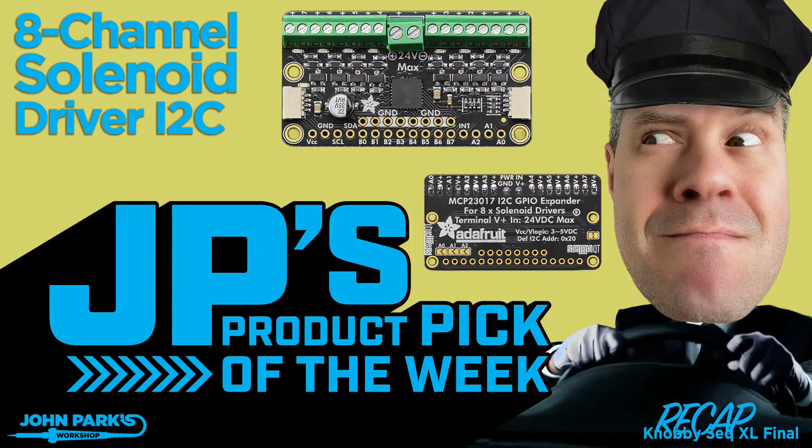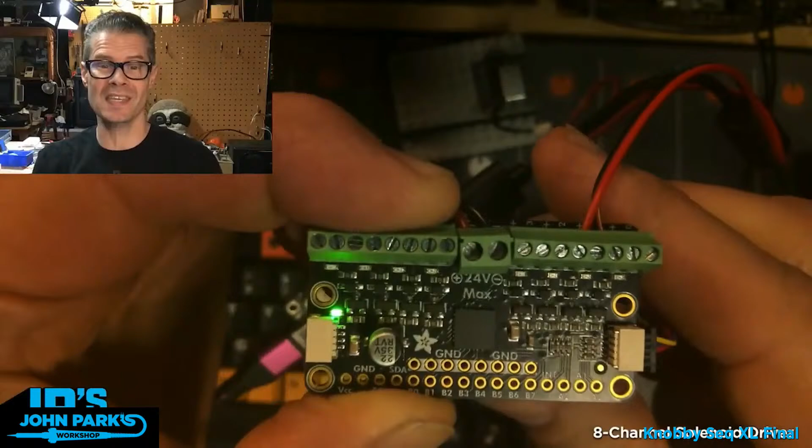Here's a 1-minute recap of this week's product pick: the I2C 8-channel solenoid driver. This can be used with Stemma QT for easy hookup, and it can be solderless since we can provide power to the middle screw terminals. All the solenoids you can drive have their own screw terminals, 4 here, and others scattered around a bit.

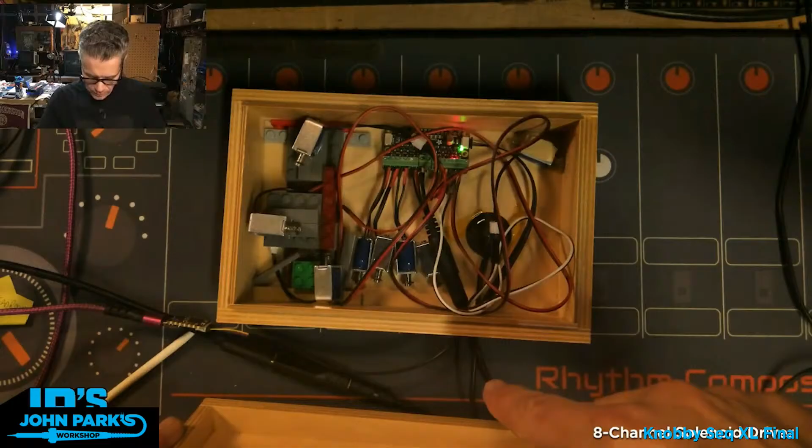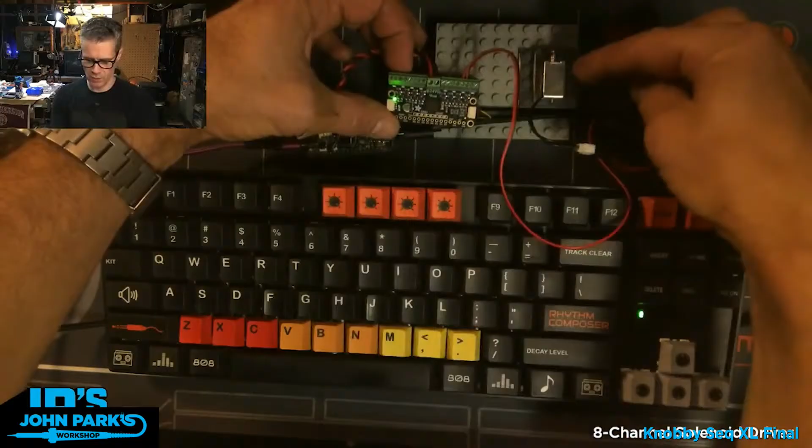Not a typewriter project, but I love this project. I made a little mini version I can demo: a USB cable runs to the computer, into the Feather with USB host RP2040, then my keyboard is plugged into that. Data and power go to the solenoid driver board, and I have this little baby solenoid here. With every stroke I type, we get the little solenoid driving. It's the I2C 8-channel solenoid driver board with Stemma QT.

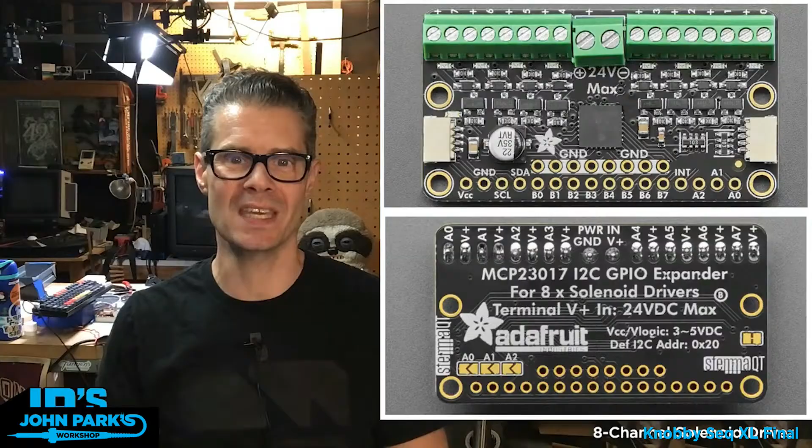Yep, that's what it is. I'm just plugging something in, so I was a little slow on the draw there. Let me plug in the Feather board I have sitting here for our next section. Whoa, hey, stop that - I'm gonna ruin all my camera work for the downshooter for this, but it's worth it, right? Here we go.

Let's get ready for this CircuitPython Parsec.

Oh, haha, I hadn't turned the mic back on from before. Thanks, Andy Calloway just said microphone. It's okay, I was just vamping as I plugged in something.

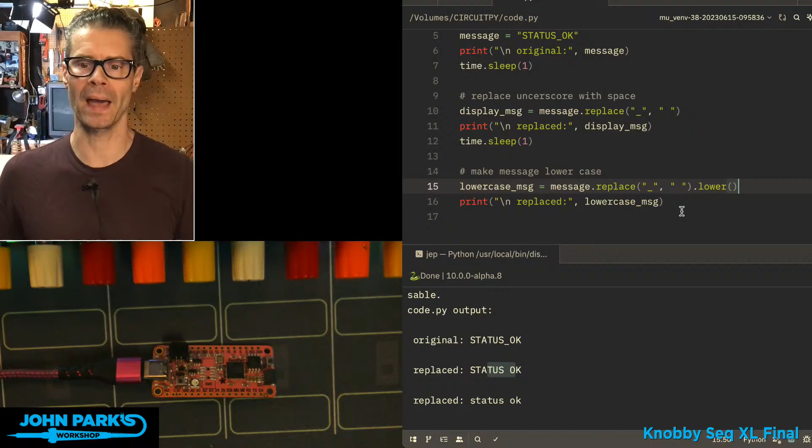Now we can make this a little friendlier by adding another command, dot lower, which does exactly like you think. It takes the original message, still does the replace, but now tacks on this additional dot lower. So you can stack up these string formatting things. I say print replaced with lowercase message, and that gives us this final one: replaced is status space OK, all lower case, much friendlier - the computer doesn't need to yell at us. That is how you can clean up your text using dot replace and dot lower on your string messages. And that is your CircuitPython Parsec.

All right, I got my microphone running this time. Thank you, sorry about that before.

All right, so now next up, let's dive into - let's jump into this gizmo right here that you can see. I'm going to raise that camera up a little bit, and I'll fix my... I really need a new camera arm, this one is screwy.

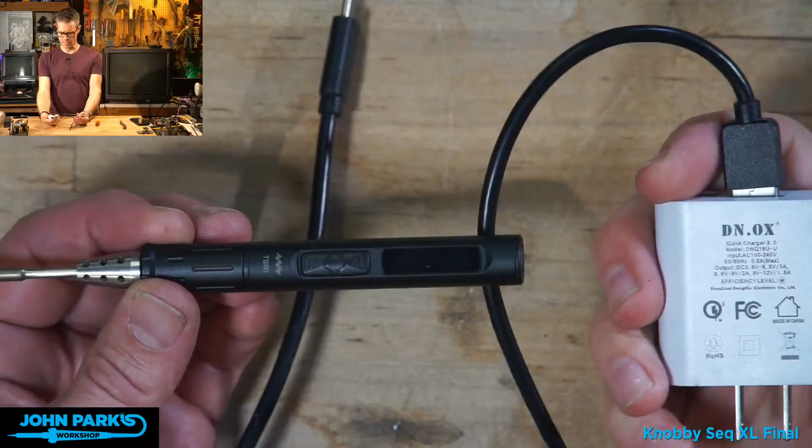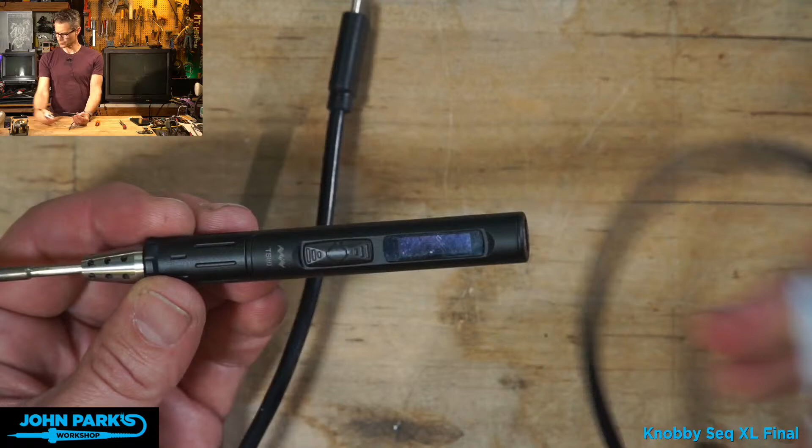And I was trying different USB cables because I was worried I was just underpowering the thing. It comes with and uses a power delivery supply - this is the one that came with it, and it can ask for 9 to 12 volts at 1.5 amps, and I think what it asks for is 9. I knew that supply was working, and this is a nice quality, thick USB-C cable, A to C cable. But it was throwing a sensor error, so I figured something was wrong with it. I went after the show and looked at some troubleshooting info on it, and one of the first things I saw was the main manual's very first page talked about assembly.

Oh, I forgot, I've never undone this. That's how it came in the package. It's meant to fold down real small so you can carry it with you.

I forgot it uses this little 3.5mm TRS jack, which is wild, as the connection for power and sensing. So for it to check the tip temperature, which is I think the sensor error we were getting, or maybe there's just a check for whether you have a tip plugged in at all.

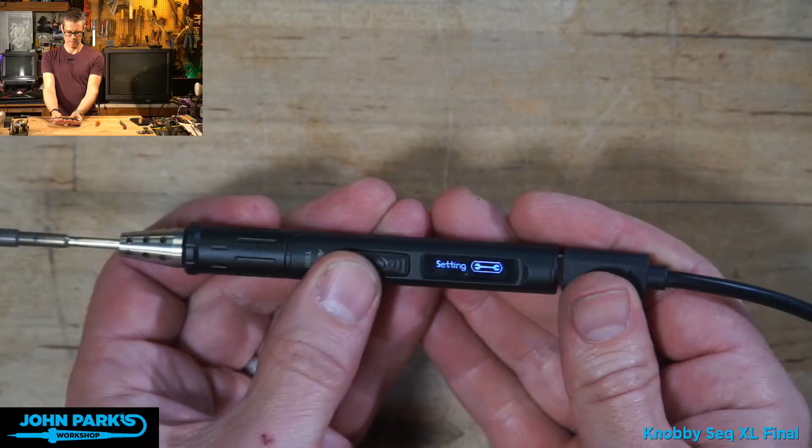This was pulled out a tiny bit and I didn't notice. So when I was trying to use it, I got... all right, looks good, great, heating. Oh, it's heating now. All right, let me pull it out a little more. Sensor error — so it was like there, enough to get me a sensor error. Plug it in the rest of the way. Let's restart it.

Good, if I press that first button, it'll start heating. It also has a little tilt sensor in it, an accelerometer of some kind, so I think it will cool itself when it's level, like if you set it down on a surface.

Some nice safety warning just showed, classic safety first: if it smells like chicken, you're holding it wrong.

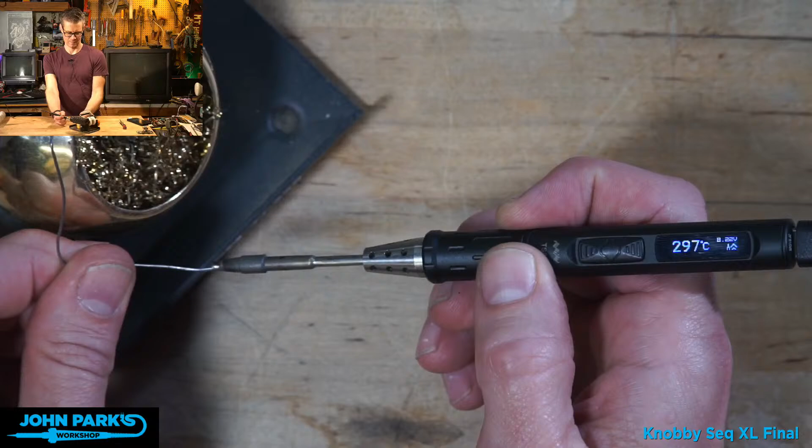So now we have... yay, we've got solder. I think this... oh, it just said low voltage. I think I'm wiggling this thing out too. Yeah, this is not the original cable it came with, and this one is wiggling a little bit, so that's not a good sign. But as far as the problem I was really having, I'll try some different cables.

Sensor error is gone. This reads 8.22 volts, I guess that's what it's using. Kind of curious if we throw a meter in the middle — so yeah, it's about 8.3 volts at 2 amps.

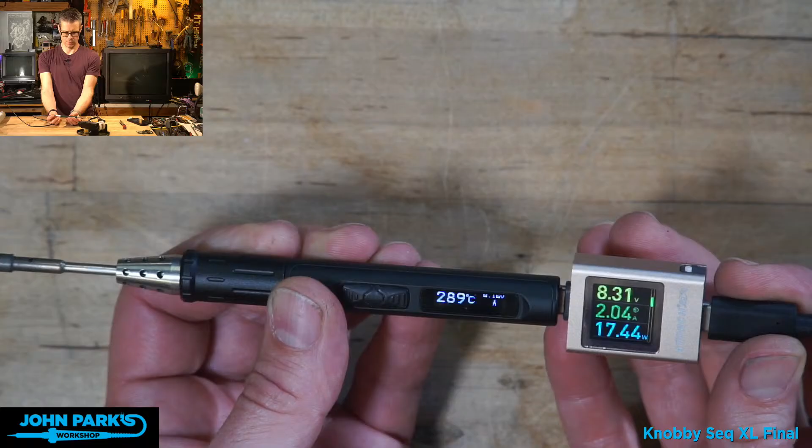It's kind of blinking all over the place. I think maybe this little connection is a little wonky right here. But yeah, it's saying it's at 300C, and it's asking for about 8.5 volts. I wonder if it's sort of pulsing to stay at temperature, like a little PWM thing, and that's why you see this flashing.

That's my guess, actually. I think if you set this here, eventually maybe it just times out. I thought it had a tilt sensor that would tell it to turn off.

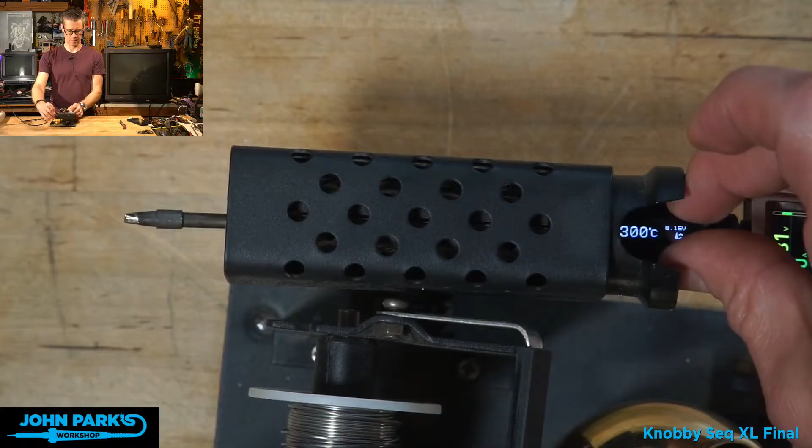I usually just — I don't have a good holder for it, so I just use this more typical iron holder. I set it in there like that. It's a little heavier because of that meter. Set it in there like that, and eventually it just turns off. But I just got to be careful not to touch anything with that.

So there you have it. That was the mystery of my soldering iron last week, and I don't have to get a new soldering iron, which I'm happy about, because I don't solder here at the workbench a ton. I have another studio inside that I use, and a good iron there.

That's cool enough to touch already. Pull that out, and I guess this is the deal with these — I don't think the tip comes off of this, so I think you have to buy this entire little assembly if you're going to use different tips. But I just have kind of a nice chisel tip on there, a wide chisel tip.

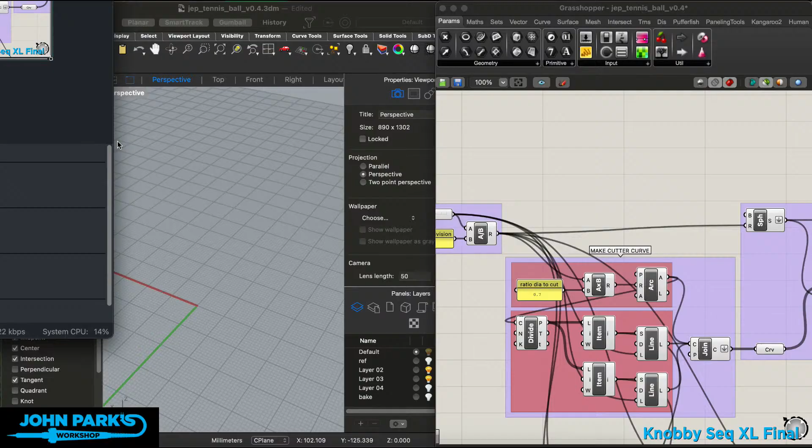NURBS spheres typically have a pinch at one end or two ends, and so to remove that pole for different texturing needs at the time, the concept of a baseball style topology is kind of nice. I thought Rhino had a baseball geometry, but I think I actually was trying to talk someone at McNeel into it years ago, like 1998 or so, 97, when the original beta was happening, and they said, what do you need this for? They weren't that convinced, so I don't think it ever happened in Rhino.

If you look it up, there's some tutorials of people making baseballs and tennis balls using original NURBS or sub-D or polysphere, and then cutting away some stitch stuff. But I wanted the real geometry to be these 2 intersecting sections.

Oh, I like that idea. John Nudge says, model in a groove for an elastic band or O-ring for closure. That's a great idea, thank you, John Nudge. I may just do that. I really like the hair bands, or the slightly thicker, but yeah, it's more like a silicone O-ring style thing.

That's a great idea. So if you create, let me just make a sphere.

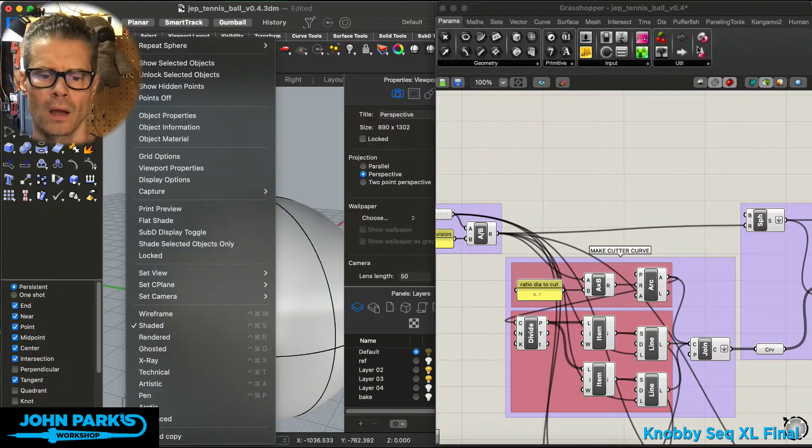You can see the type of geometry NURBS want to be by default, or polygons are going to be a whole different story. But that's sort of the topology of a sphere.

So what I decided to do was create this grasshopper network, which allows me to do some parametric modeling, so I can set the ball size. In this case, I'm going to say a 68 millimeter diameter ball. Part of this is because I was ordering regular juggling balls, and they come in sizes like 62, 68, 70, 72, 74, 100, and some of those sizes are actually pretty similar to each other. One's more like a baseball, one's a little smaller than a tennis ball, one's more like a lacrosse ball, so I just wanted to 3D print some of these to know which ones I wanted. That was the original genesis of me building this parametric builder.

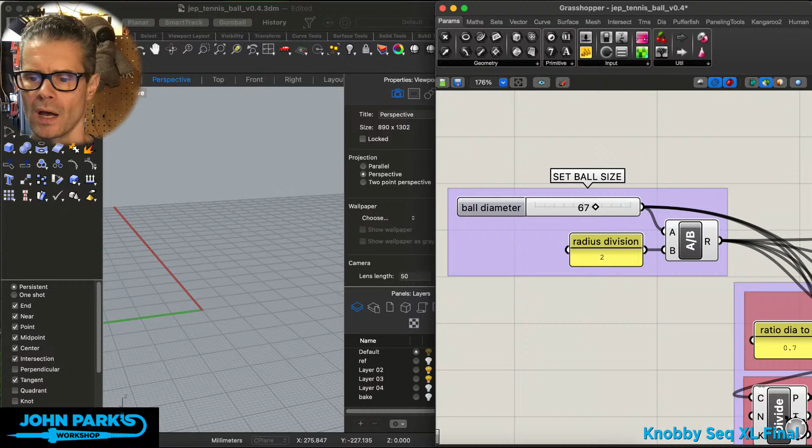What I do is create a slider here, an integer slider, so millimeters in whole numbers. We'll switch this to 67, how about. And then I divide that diameter by 2 to get a radius, which is what my next node wants, which is this sphere here. So this sphere node is now being created at whatever that radius is. I can adjust this here and you'll see that change. So there's my 67 millimeter diameter, which becomes whatever that is divided by 2 as a radius.

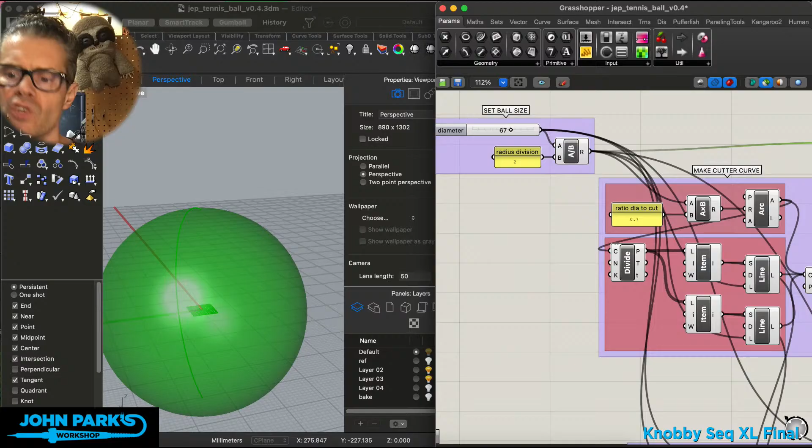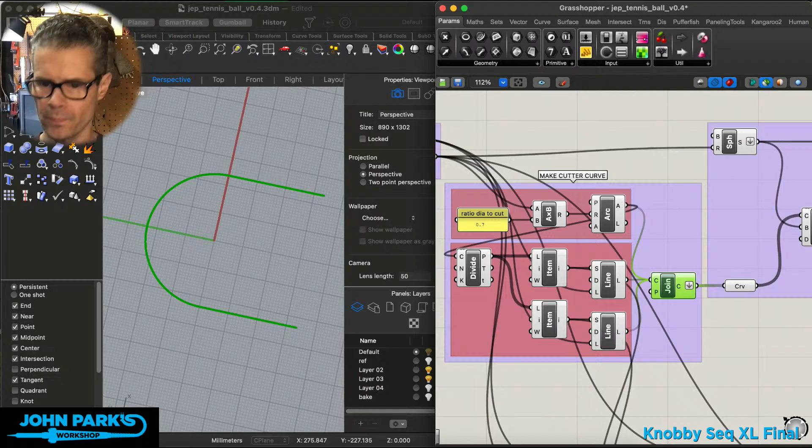At the same time, I'm deriving an arc from that sphere, based on that same value. So if we look at this arc right here, it's also based on that number. Let's go back to 67. I get an arc, and then I'm using the points on that to derive a couple of lines, which I'm then joining up to create this arc horseshoe, which I'm going to project onto the sphere from the top.

If I go to a shaded view of that, I think you can see, go for the wireframe. So there's my sphere, and I've got this projection landing on top of it. See it there, so there's the original thing. When it does that, since it's larger than the bounds of the sphere, we get this curvature, because it's just as if you've done kind of projecting with a film projector, but it can X-ray its way straight through.

Once I've created that, I can split my sphere into 2 pieces based on that line, trimming it into 2 sections. So now I've got the outer shell, kind of like these thin ones here. Let's take this piece, and I can offset it to make the innards.

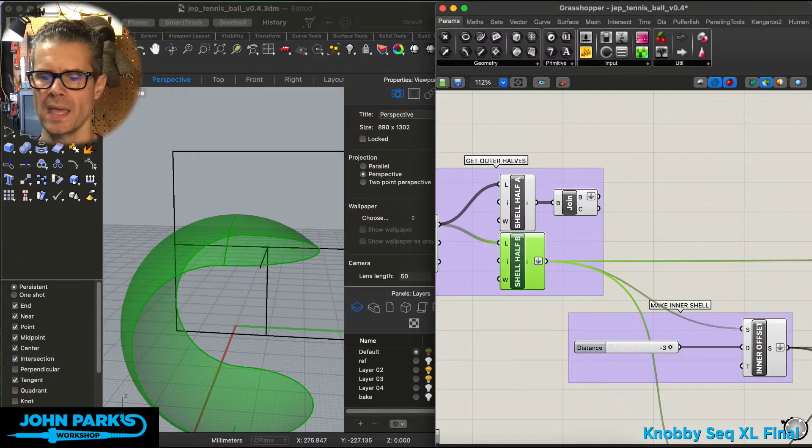So here's the outer and inner shell, and I essentially decide how thick do I want this to be. I can adjust this in millimeters, how far to offset that, so that's how thick the wall is going to be. I'm doing a 3 millimeter wall in this case.

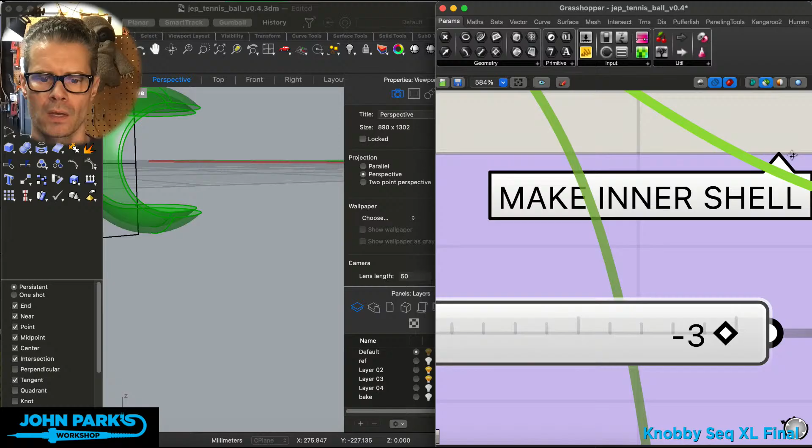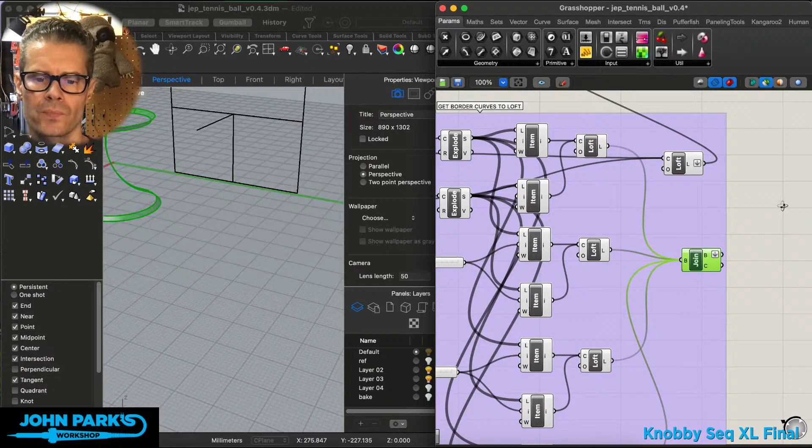And then I can use those 2 surfaces and their borders to generate a little lofted connection between them, which gives us this flat V that it grooves into between the 2 pieces, and that looks like that. So that's simply the 2 borders lofted with a straight line. You can make that have curvature if you wanted, but I'm keeping it as a straight line. So here's the loft I'm using, I need to ditch that one, that was a more complicated way. So there I get the lip, I get the inner surface, I get the outer surface, and I can join all 3 of those up into one object.

So this is the final geometry here, which is pretty cool. Here's a final touch, which is when I started to print these, I wasn't sure which size I was looking at. I was color coding them at first, but if you see on there, this one says 78, so this is a 78 millimeter ball. I didn't want to have to do that by hand, so I automated all of that, made it parametric as well.

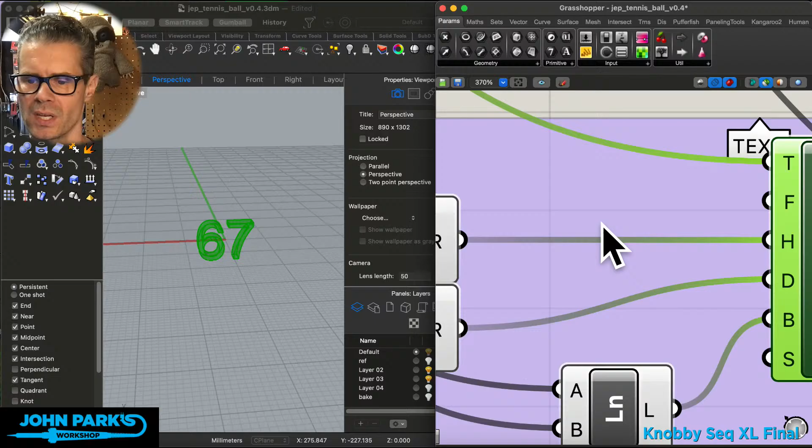You can see here I've got some blocks about text. So this is a text surface that creates, in this case, 67. It's upside down, I kind of have it move around and go to the right place after it's been built. I can't remember why it's building there, I could change it, but I've got to move it anyway. And so this is the factor that I'm dividing its scale, so it scales along with the ball radius as well. I got some factors there for adjusting its font height and the depth of this piece of geometry I make.

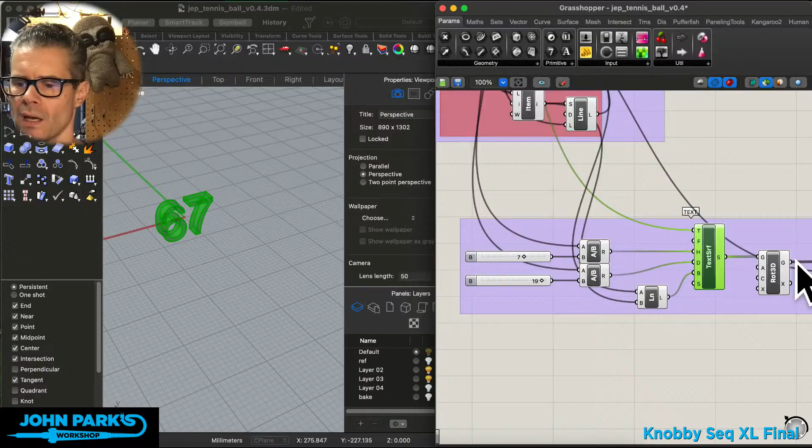I'm rotating it in 3D, I'm moving it some amount derived from the radius, so it's actually at the top of the ball there. And then I can chop it out, so there's the top of the sphere with that carved out of there.

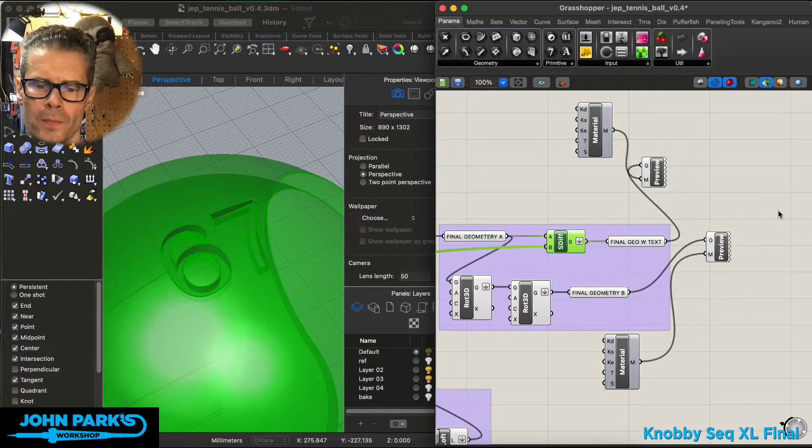And I can render that to make it look a little nicer. So now you can see if I go and change the diameter - I hope I haven't been saying radius this whole time, it's the diameter - if I go up, boop boop boop, we can have that little cutout there. And then I'll export that geometry.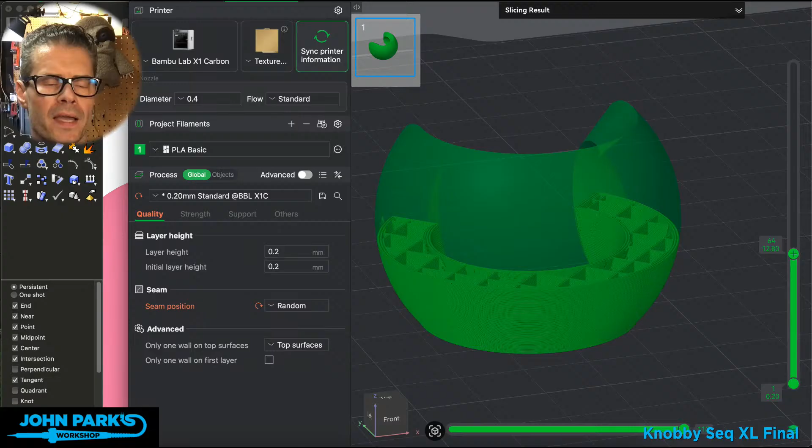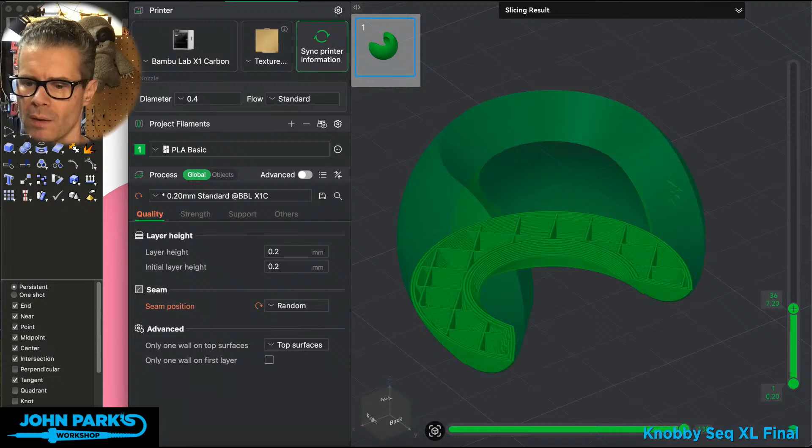If I take a look over here in a 3D slicer, this is Bambu Studio I'm using here, you can see we get a pretty nice type of geometry to print. You don't need support material for this stuff, it's gradual enough. It's a pretty thick ball I was making here. This is one of the smaller ones, a 46 millimeter. But you can see I'm putting a moderate fill in there, and that'll print really nicely just like that.

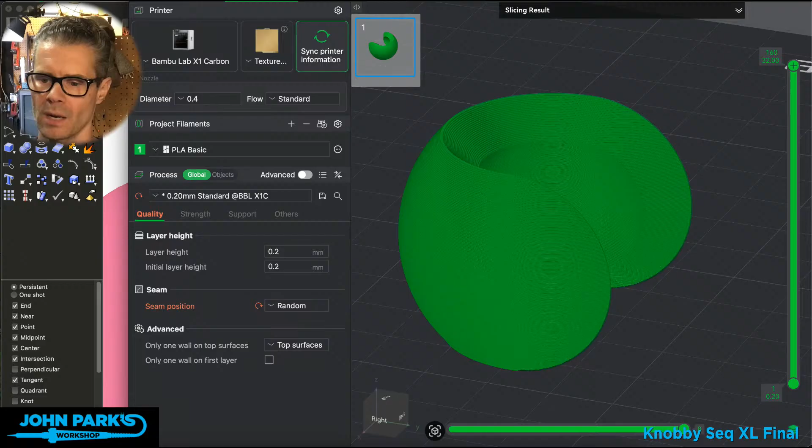I've been printing a little brim on the bed for stability, because otherwise it's just like a single thin line or loop as the first thing, and it can get bumped off of there. It's not going to balance that well. But most of this is flat on the surface, and this is why I didn't go with the more pronounced dog bone or saddle shape of a baseball.

I've noticed a lot of tennis balls are actually completely straight like this as well. Some of them have a little curvature to it. That may also be 2D to 3D topology - if you look up how tennis balls are made, the piece of felt that gets cut out has a little dog bone to it, but I think that's before it's wrapped. I think they're steamed and wrapped and glued and pressed. They end up with straight seams, which is what I want here.

Question over in the chat, someone asked what software I was using there - that was Rhino.

Yeah, Rhino 3D with Grasshopper, which is the node-based directed acyclic graph, parametric, build-your-own-flowchart of how things get built thingy. And those things can be packaged up into like a single blob that you can share with people that just have one slider - all it does is change the diameter. You can package them up as kind of little plugins that people can use too.

So that's what the geometry looks like for a particular size of that. Very friendly to print with. Really happy with how this came out.

And now I've got a way to make these parametrically, and then I'm going to add whatever mounting I'll do for QT-Py ESP32 S3. I think I'll go with a little accelerometer and a battery in there, so I can do all the ESP-Now stuff and have these talk to each other. I probably won't do glowing - that's done pretty well out there in the world already. But having messages, and in this case Wi-Fi instead of Bluetooth, is going to be pretty nice, sent to a computer from the ball based on accelerometer stuff.

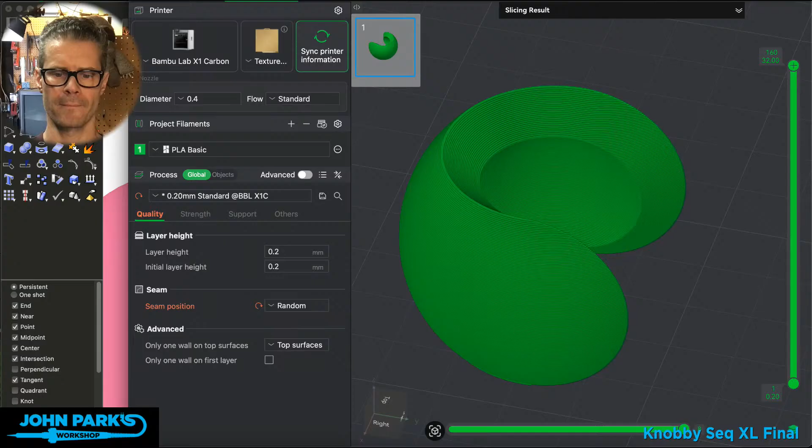That's my real goal. You could probably print these in translucent materials and do some LED stuff, and maybe I'll give that a try too. But my first goal is really just the sensor data that'll come off of these. So that's something I got up to that I thought some people might be interested in seeing - a little look into 3D design for fabrication.

Oh, one other thing I wanted to show - get out of rendered mode, go to shaded. This point about what that geometry looks like: here's a baked out version, at the end of my process, I can turn that into actual NURBS geometry and then mesh it into polygons. So this is a little cutaway that you can use to look at the geometry here.

If I unwrap this, let me see - oh, there's when I was trying to see if this would fit, what sizes would fit the BLE module. Let's see, do I have... yeah, so if I unwrap this, let me make a duplicate of this. Pull this over to the side. Oh, sorry, I wasn't showing anything at all.

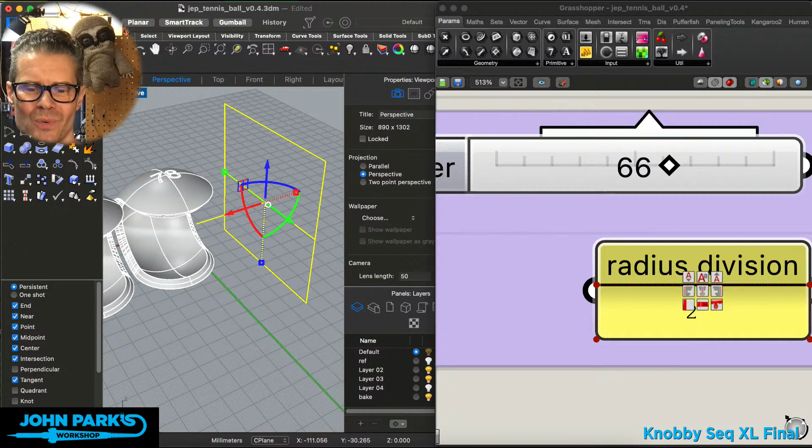Okay, all I showed was here's a cutaway - rip, so we can inspect the insides of whatever geometry by pulling through it. Yes, sorry, the chat is catching up with me and saying, hey, we can't see it.

I've fixed it, sorry about that. So there's a cutaway of the geometry.

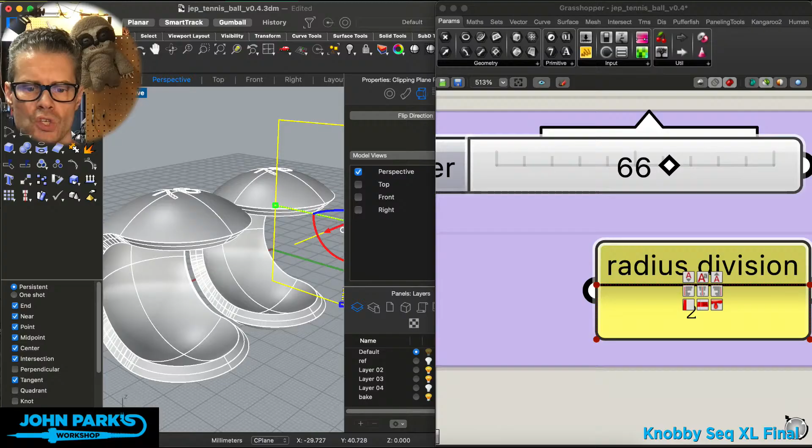I've just duplicated a copy of this and I'm going to bring it over to the side. Let me make this wider. I don't need Grasshopper at the moment, so I'm going to explode this back out into some layers. I'm just going to grab that inner shell there because it's simple, it doesn't have all that jazz.

So if we take this and do an unwrap on it, I'm going to select that set of seams, and essentially I'm going to flatten it. This is what's done for the purposes of doing fur stuff, more like in Maya and Blender and entertainment-based stuff, adding fur, adding texture maps to things.

You generally want to flatten things into a 2D space. So I'm going to flatten that, and then open up the UV editor. And so here you can see, while the UV editor is lit up, this is what that is. That geometry is in a minimally distorted, flattened out view.

So it does have that slight dog bone shape, which is what I suspected, the tennis balls start out with that piece, but then when it gets conformed to a sphere, it looks like this straight-across line here. That thing is a straight line, not so on a baseball. A baseball is a much more exaggerated saddle.